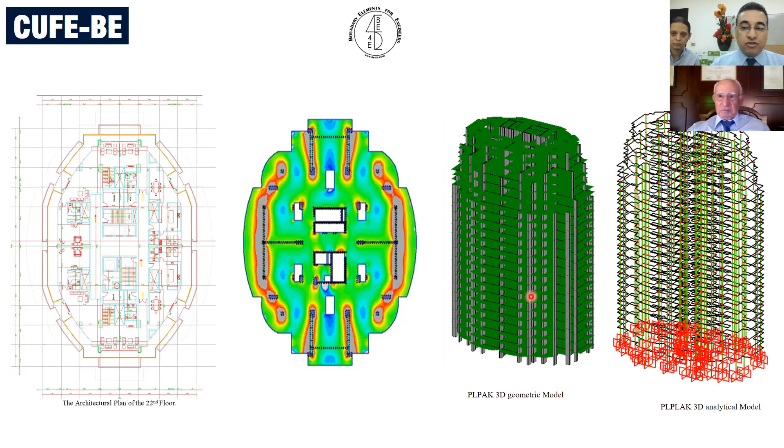This is our software in front of you. It can easily replace any available finite element-based software, and I'm going to show you the advantages of using such software. I'm not asking anybody to remove the software they are using or replace it with mine. Not at all. I'm asking you to try using two different software, one based on finite element, one based on the boundary element, at least to get a feeling that you are doing the right modeling.

We will start with a table of contents. We have 5 parts. The first part talks about the basic version. The second part is about the design tool, because we design according to the Egyptian code of practice, the ACI code of practice, and the Euro code of practice. Part 3 will talk mainly about the foundation package.

Part 4 is about the post-tension package, where we solve post-tension slabs with an optimizer. You can get cable profiles and then optimize your profile, because post-tension slabs have very good applications in the States and in the Gulf area.

Part 5 will talk about the dynamic package and how to couple superstructure with substructure, including nonlinear soil structure applications. We will also move to link it with Navisworks and demonstrate 4D and 5D for construction engineering. So you have everything, and I'm going to demonstrate videos showing this.

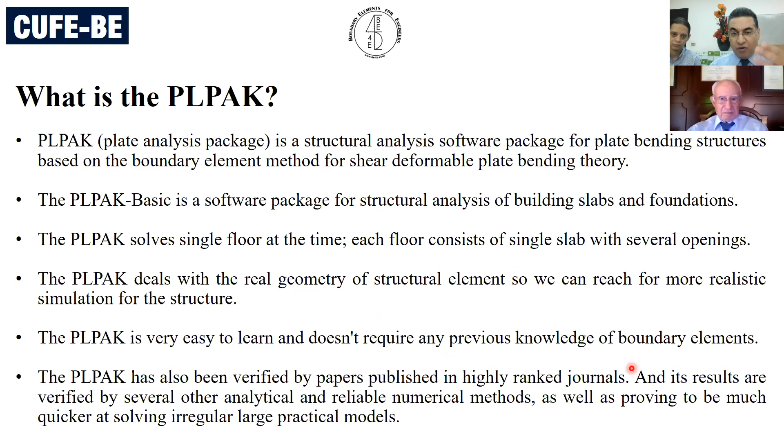I'm going to show that the best thing about PLPAK is you don't have something called an analytical model. What you have is a real drawing. You change it to something we call a building information modeling model, then you can develop your model type. As I say, I left all of that for any person to come back to.

We mainly have packages: the basic package, which solves one floor; the post-tension package, which solves one floor with post-tensioning; the design tool package; and the foundation package, which solves a foundation on piles, even with nonlinear piles and pile-pile interaction, pile-soil interaction.

We also have a dynamic package. If we couple these packages together, we get a tall building over a fixed base. If we couple the foundation package with the fixed base, we get the overall package.

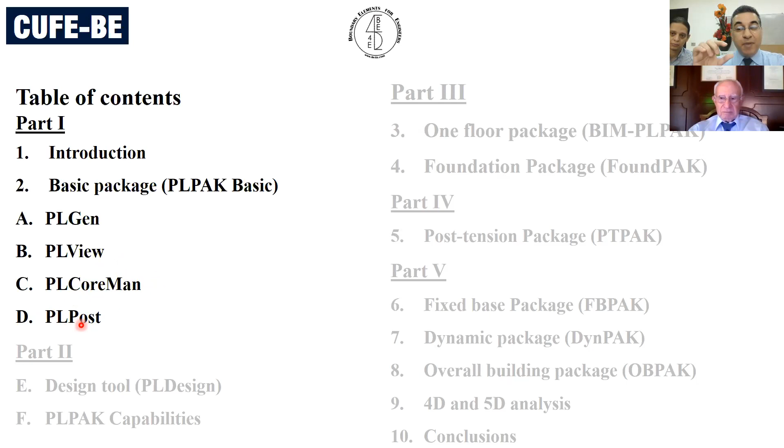The basic package, I'm going to talk about solving one floor only. We have PL Gen to generate your building information model, PL View to view your numerical model, the solver, and the post-processing to demonstrate the result. One of the good things is the post-processing data — you can zoom in with a lot of accuracy because you have continuous internal modeling.

This is a very simple slab with a beam, and this is the PL Gen model. This is the numerical model — you don't have points and lines, these are the boundary elements. I'm demonstrating here the beam and how it can get inside the column. You can simulate partial fixed and total fixed conditions, and this is a very simple bending moment demonstration over the beam, with these being the boundary elements. You don't need to discretize inside for people with us.

Here I'm demonstrating a very simple problem most of us know in civil engineering. This is called a slab beam type application, where the slab is carried over beams. This other one is called paneled beam type, where the beams work as a stiffener for the slab, but the behavior of the slab and the beam is just a slab.

Showing the dish shape, only one, and here you can see the dish shape inside each cell. This is very good for demonstration and teaching purposes.

Here I'm showing something we published in the ACI journal, I believe, and this is the only paper in the ACI journal that talks about boundary elements. I was even writing to them that they have to consider something in computational mechanics, because they only talk about experimental work.

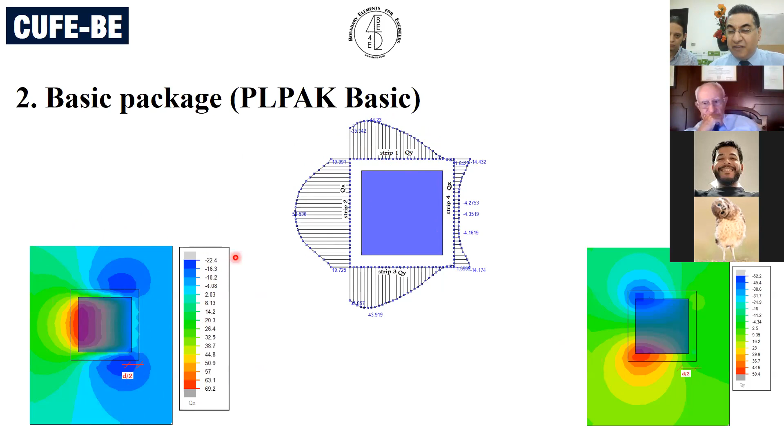You can see here the shear stresses around the columns, demonstrated as lines. This is the linear stress hypothesis for the shear stresses. You can zoom in and see the shear stresses inside and around the column. This is very difficult to do in finite element, even impossible without 3D finite elements.

We have, as I said, the generator, the viewer, the core manager, the solution, the post-processing, and the design tool. Looking quickly at the generator, it allows you to build your model, edit your model, and shows the boundary element division.

You can define materials, any material you like. As I said, I'm going to leave all the details in the presentation so you can come back to it as a standalone document. You can define load cases.

Here you can define load cases. You don't need to define combinations at the moment, because combinations will be defined in the post-processing. It's not like finite element software.

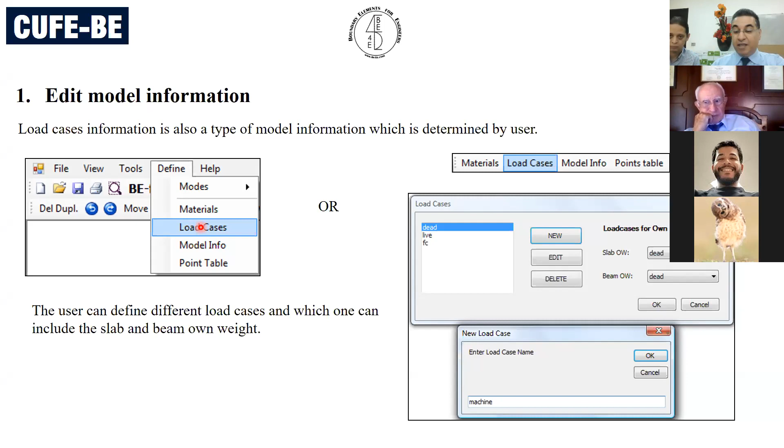You can define the model information, and this is a very important point: the beam and the column can be taken as an area. We are not cheating, we are not showing the column as an area when it's actually a point. No, it is an area.

The beam itself uses the actual size of the beam, even the first cell of the beam, and you can control it in order to model the transfer beam in the shear walls.

This is something called PL controls, which allows you to modify the program day by day. I'm not going to talk about it because it's research-wise; we have about 500 controls, some not even used. We use these controls day by day to improve our software.

You can start your building information model in one of three ways: either draw your model directly on the interface using the drawing tools I'm going to show you, or import your model from an AutoCAD DXF model.

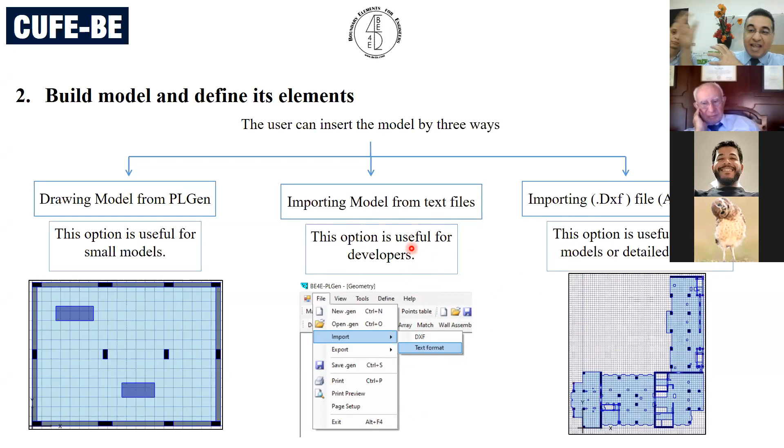You can also import from a text file. You can write your model as a text file, and this is very important because you can have other software, something like finite element-based software, use this text file as a translator and import it from there.

Or you can get it directly from DXF format. I'm going to show you how to import your model from DXF, and these are the tools, and this is to show the beam model.

Here is a drawing environment. If you want to draw, you have a grid, you have coordinates, you have everything. These are the modes you have, and these are the elements you draw at the beginning.

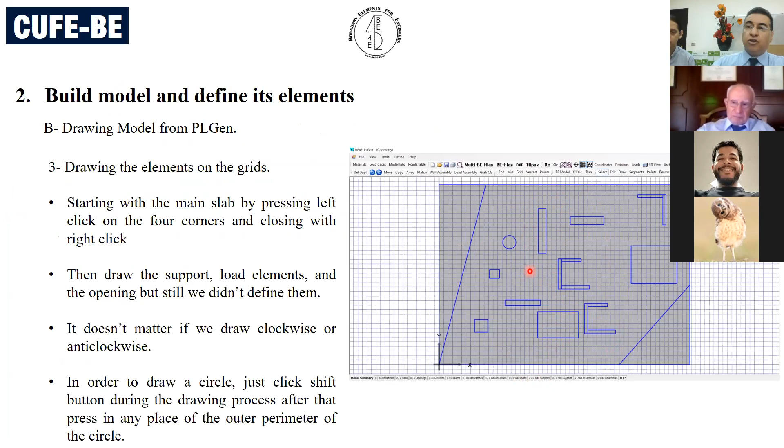You have a slab, supporting elements, loading elements, and initially none of them are defined. Once you draw your elements, at the end of the day you will define each one, either as a slab, an opening, a geometrical object, a loading element, or a supporting element. Here you select your tool and define it.

As you can see, after the definition, these are the slabs, these are the column supporting areas. We have something called wall assembly to join walls together.

I'm going to show you something we've done based on the formulation of Professor Katsikadelis on warping. We join slabs together using vertical elements, just line elements, not shell elements, but we reach the same results as joining them as shell elements using what we call a warping wall.

You can define drops, and this is done using a very intelligent trick, which we published in Engineering Analysis with Boundary Elements. I'm not going to talk about it today because I promised not to talk about mathematics today. Or you can define that the column is moving above or below the slab.

Everything can be defined in this model. Once you have this, what you have to do next is define your load cases.

This is element by element definition about its properties. This is the columns, for example. This is the wall support. You have columns, you have wall support, you have soil support.

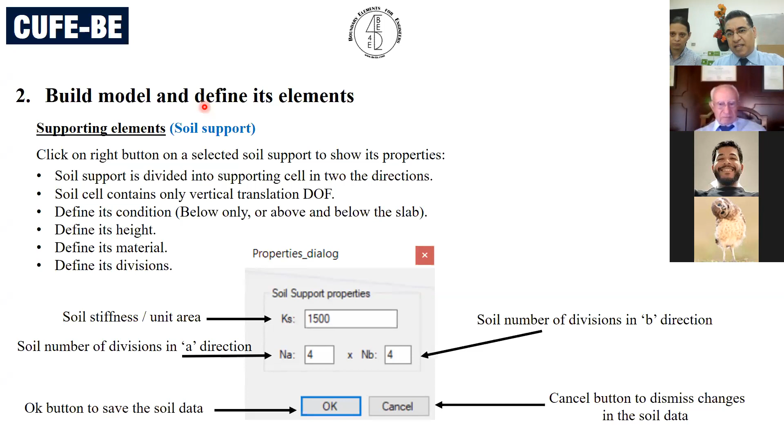And if you have layering, you can have all types of layering, even the way of Steinbrenner approximation. It is based on colleague work for Professor Katsikadelis, Professor Stavridis. This is the soil support drops. You can define it. I leave all of the details here so anybody can come back to it.

Wall assembly, if you have assembly of walls, as you can see, this is wall assembly. Even if you have very strange column shape in the plan, you can define this column shape with the actual area, and you can get exactly the straining action, and in the vicinity of the column, you can check of punching.

And you will see we were able to check of punching due to warping. And we published this also in engineering analysis.

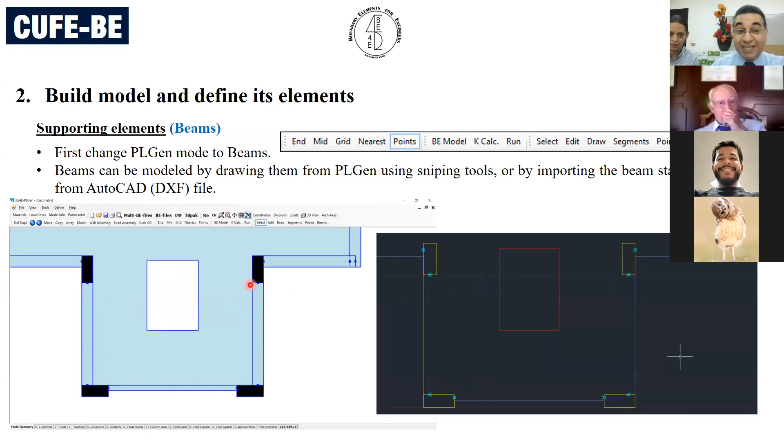Here, the definition of the slab, this is the analytical model. Here is the analytical model. It is not a drawing. This is the analytical model. We don't have wireframe anymore.

Okay, this is the definition for the beams. Here, I'm going to show you how the beams go inside the column for the partial fixation or fixation. Even if you have a beam just touching another beam, you can compute the torsion transfer or the moment transfer in this area, in this way.

This is the definition of the column load, the loading elements. We have geometrical elements, slabs and opening, and you have loading elements and you have supporting elements. Wall load, load patch, wall and load assembly. If you have wall and load assembly, something like this is silo over piled raft, and we were able to model it.

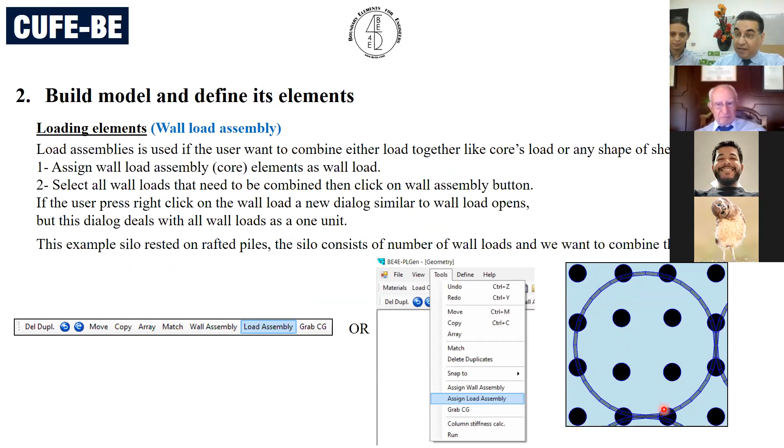We have used this software in a lot of practical applications here in the area of Egypt and North Africa and Gulf area. This is, for example, the silo problem.

And here is the tools you have in the PLGen generator. You can match properties. For example, if you have the property for this file, you can match all other properties. You can draw array. It's the same like the drawing tools in any CAD tools or anything.

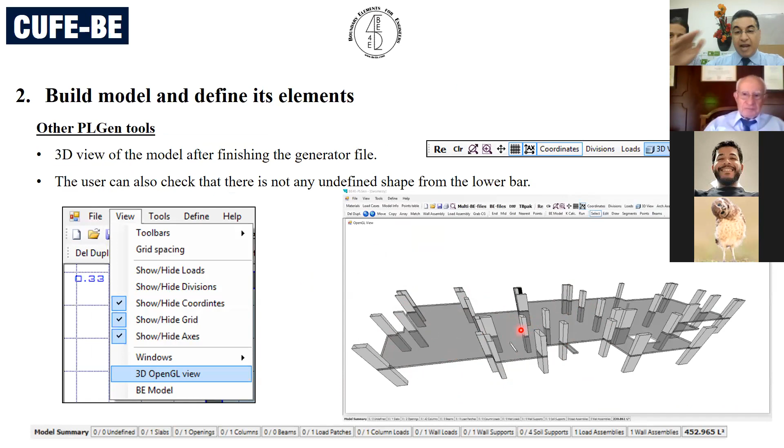This is the view, a 3D view in OpenGL mode for your slab to check that you have done everything correct. You don't overlap anything with anything. At the end of the day, you can define your division.

In the building information model, we start to move to the numerical model. With the numerical model, you define all of your divisions here, but it is written as a property of the object.

Here, it shows the divisions also. We finished now. How can we generate our model?

If we go to the BE model, it is a numerical model now. With a numerical model, I'm going to show something very, very important. Just keep concentrating with me because I'm going to show something very important.

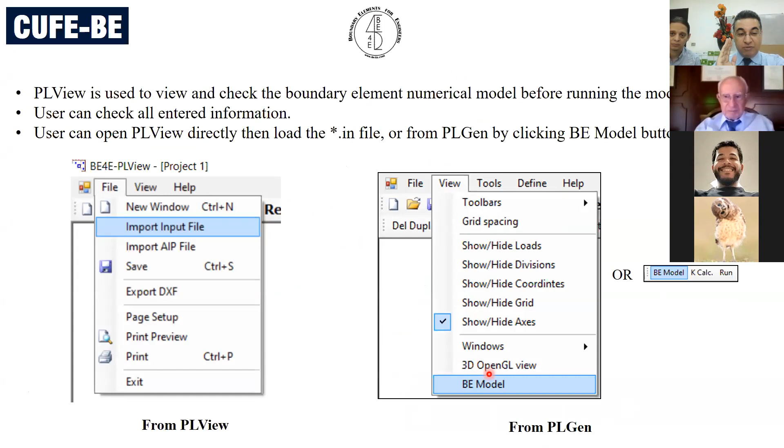This is a numerical modeling with different load cases. If you have different loads, it will show differently in the 3 views. And all this is a toolbar you have.

You can define the normal, you can define the direction of the boundary. It gives you the numbers of the boundary element and everything you have. You can zoom in, out, anything. And here is a numerical model you have.

The most important thing I'm going to show now is this. This part, when I'm going to show you the support takes some sort of colors, as you can see. These colors tell you what are the groups of stiffness you have.

And this software is very, very important. You can define multiple stiffness supporting elements. For example, if you have a plate supported on a truss, you can do it. If you have a plate supported on a very strange structure down to it, what you have to do is define the stiffness, and it will be shown here.

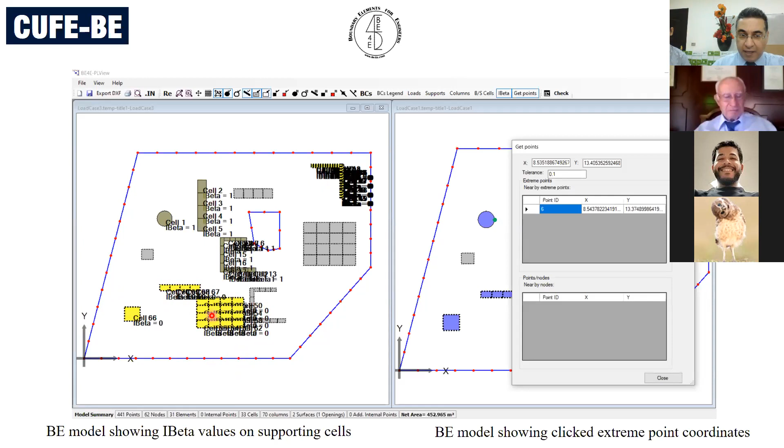For example, here we have this area is a supporting area, supporting structure, and this is another supporting structure. Even if you have a circular column with circular area, we don't cheat. The circular column with circular area, in the numerical model, is defined as circular area.

And this is very important for piles. You can show your result in tabulated form also.

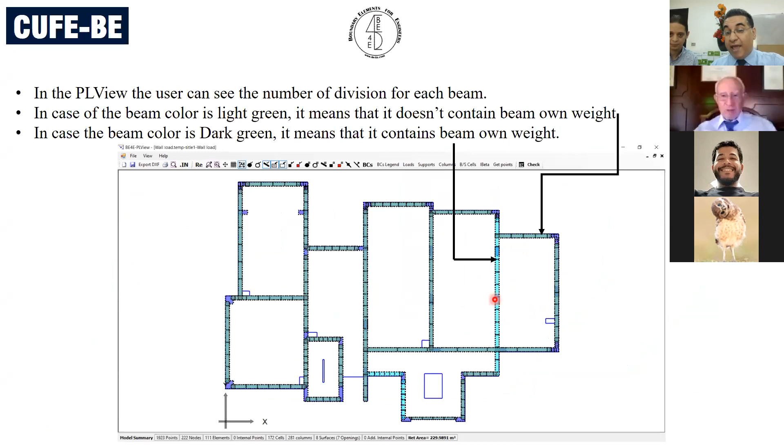Here, you can define all of the objects you have, like how many surfaces and how many objects you have. I'm showing that one of the beams here is not loaded with its own weight. This beam has its own weight, and this beam is without own weight.

It will show you also. This is the numerical model. If we go for the solution, it's done.

I'm sorry, we just have an internet connection issue. I'm back here now.

Fady, can you come with me, please? What are we doing here? How can I share the screen? Okay, Fady is an expert in doing this.

So we are back now. I'm sorry for this, but we experienced a lot of internet connection issues, but we will come back. It's not a problem.

In the solution manager we have... and share, okay, is that right? The solution manager here, you can start to run one by one. You can sit down.

We can run by load cases, and we have several solvers. We have the normal solver, the GPU solver, and multiple core solution. For example, here in Cairo University, we have a very big server, and we run this using several cores.

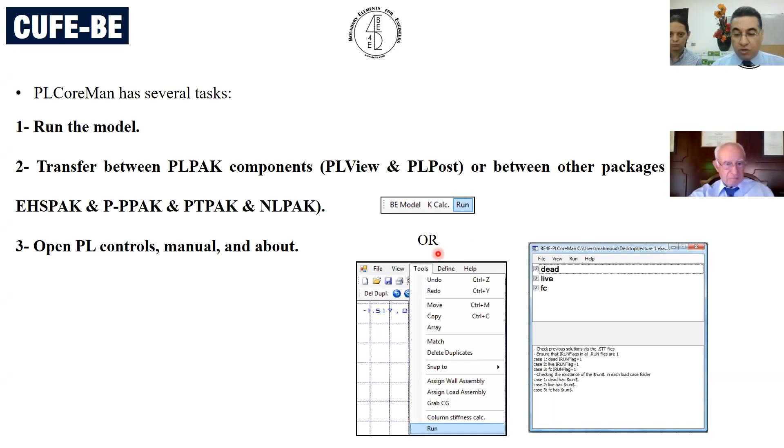This is the solution. It shows you the case by case solution. The most important thing here is you can add your stiffness for the elastic half space. For example, if your raft is supported on elastic half space or supported on piles, you can link it to the elastic half space model and link it to the pile solution.

Okay, or you can go directly to the design package. After the solution, you can go direct to the design package. So this is before the solution, and this is after the solution.

After the solution, I'm going to demonstrate how we can show the results. First, before anything, you have to export some data from the model you have.

For example, if you have a wall assembly, this assembly has to be imported from the object itself in the model before we get the results for it. Because of that, we imported it from the generator, and this is for the wall assembly and for the beams. Then here we can define all assemblies, and we can also define load combinations.

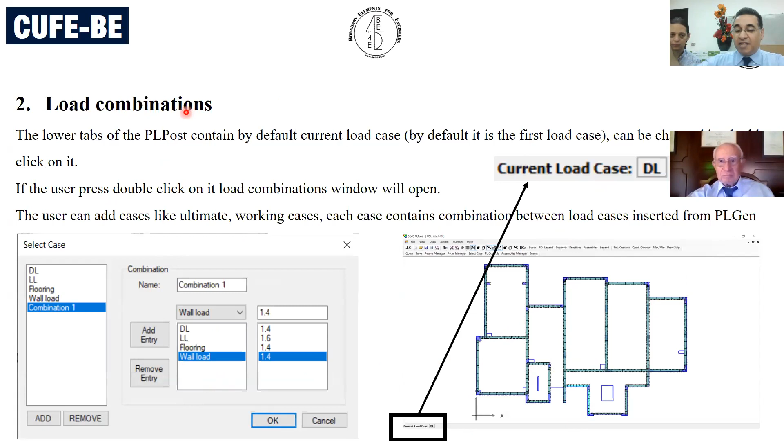Now the load combinations are defined in the post-processing stage. We don't define the load combination at the beginning. You can show the result as contour lines, rectangular contours, quadratic contours, or you can show strips, linear strips.

Here I'm going to show the contours. This is the contour lines for the moment, for the deflection.

You can show the rectangle contours over area, and you can zoom in with different resolutions. You can use 10 by 10 points, or 100 by 100, or even 1000 by 1000.

You can even have it very, very smooth, and draw it as a flat contour like this. This is very important to zoom in on places where you have an opening, columns, or something like this.

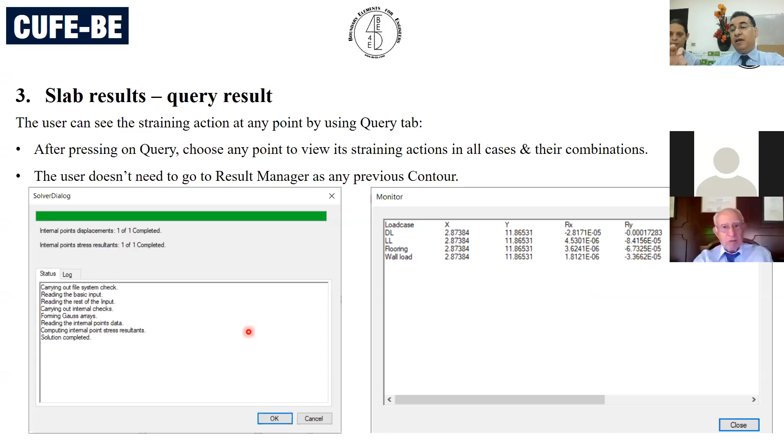Or you can pick a point and get the result at this point. These are the strips. You have a strip, and you can get any result you want—moment, shear, even the moment in this direction. Even the design moment, where you add the MXY according to the Wood-Armer equation.

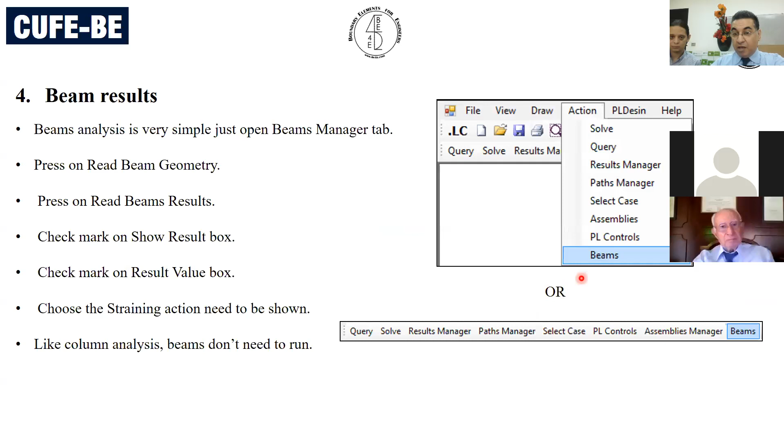You can show the support results here as a pressure or as a total load. You can show the assembly result. For example, if you have a multiple core load assembly or something like that, you can demonstrate the assembly results, or you can demonstrate results on beams.

You can have it. The design tool, I'm going to leave it for Ahmed Fady to represent. Okay. The design tool is a tool used for the PLPAK, plate bending.

Again, we have an internet connection issue. I'm sorry.

Actually, we are using here two ways of the internet, so we are swapping. Once we have a problem here, we swap to the other one.

So continue. The design package is to design the slab and the beam using 3 codes: ACI, Eurocode, and Egyptian code of practice, and there is applicability to add any other codes required. It gives not only the design values but also calculation sheets in Excel or spreadsheet format, and CAD drawings.

Also, you can check punching and check deflection over irregular spans. Yes, over irregular spans, this is very important. This will show how to get the PL design from PL post if you are using PL post or for the core manager.

Then we will talk about the design package in 7 items: what the file needs to be exported from the model to use in the design, how to start the PL design, define the load combinations and the envelopes. You can design based on the envelopes, not only load combinations.

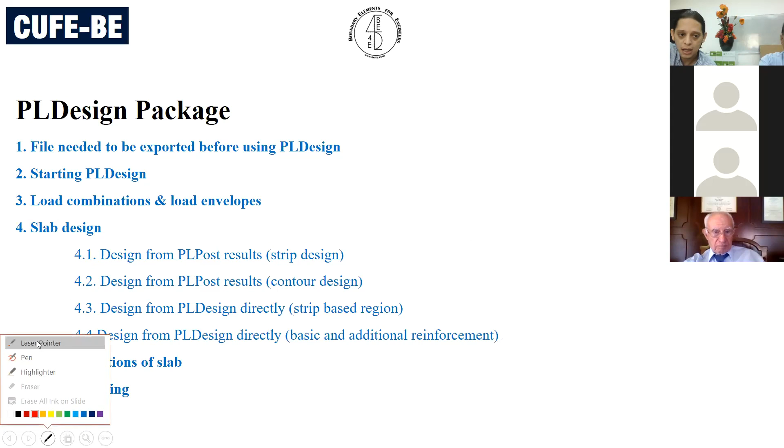Then we will talk about the design of slabs in 4 cases, and the check deflection, check punching, and beam design.

First, we export 3 main files. Export beam assemblies to read the assemblies of each beam from the gen model to a PL design model. We export the results file - we can save results from PL post and use it in the design - and export the assemblies file, as Professor Youssef said, for the assembly cores or assembly supports.

How to start the PL design? You can start with the model you already designed before, or a new model. In this window, you will choose your code.

There are 3 codes, as we said, and the parameters of the steel and the concrete. Also, you will choose the units you will use in the design, and define the material properties you will use in the design.

After that, you will define your load combination and load envelopes you will use. Slab design can be done in 2 ways.

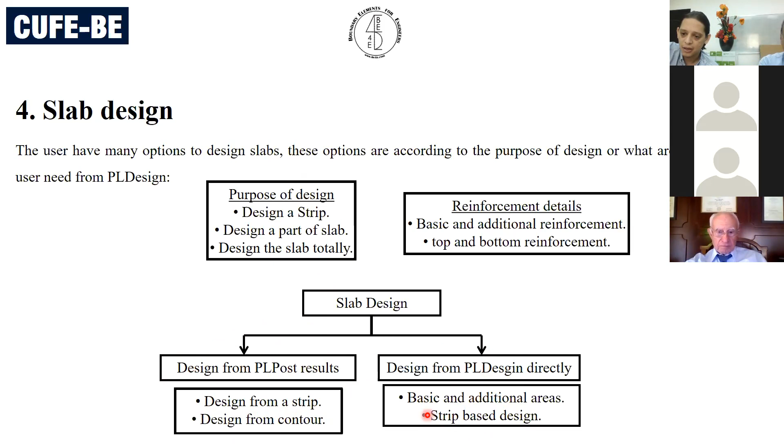I have already saved results from PL post and I design based on 2 methods, strip method or contour method, or I haven't saved the data from PL post, so I will use PL design directly, using 2 methods: basic and additional, which is common in civil engineering design - in Egypt, I don't know how it is in Europe - or strip-based design.

So we will talk about these 4 methods. This is the strip, already saved from PLPost. You can import it here in the PL design from the results file you have already saved.

After that, you will choose design slab, and from design slab add strip to the main model. After that, you choose add strip to this model. You define the 2 parts: the first part, the above part, is for strip properties - the widths of the strip and which moment you will design based on it.

And units - you integrate the moment over the strip; we don't use only one value. We integrate the moment to smooth it, and we put our reinforcement over the strip.

Exactly, and the second part, in the bottom, is to define the spans. The PL design automatically divides your strip into spans. In each span, you will define the cover of the reinforcement concrete and the detailing - the details of the steel, number of bars, the diameters of bars, and the arrangement of top and bottom.

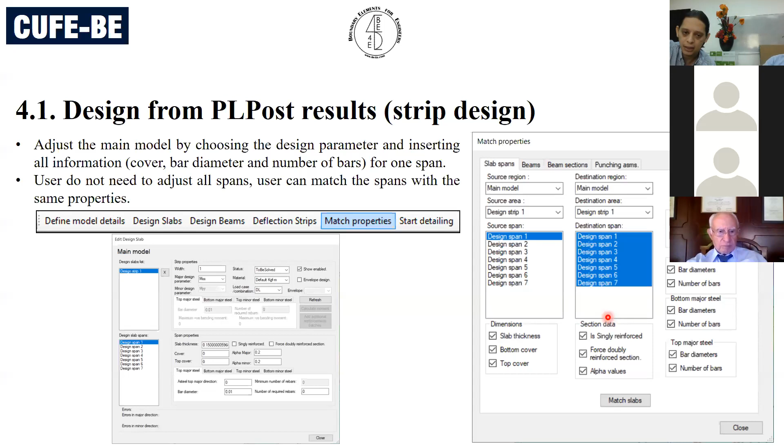And then you can use match properties to match similar spans and other strips. Then it asks you if you want calculation sheets in Excel format or not.

This is the Excel format here, right? Yes, this is the output Excel sheet format. It gives you the code equation number and the value in front of it.

After that, you will check the design to ensure there are no errors and it's safe. If it's unsafe, you will increase the steel and repeat the same steps. After that, you can export a summary of this design data in only one Excel sheet.

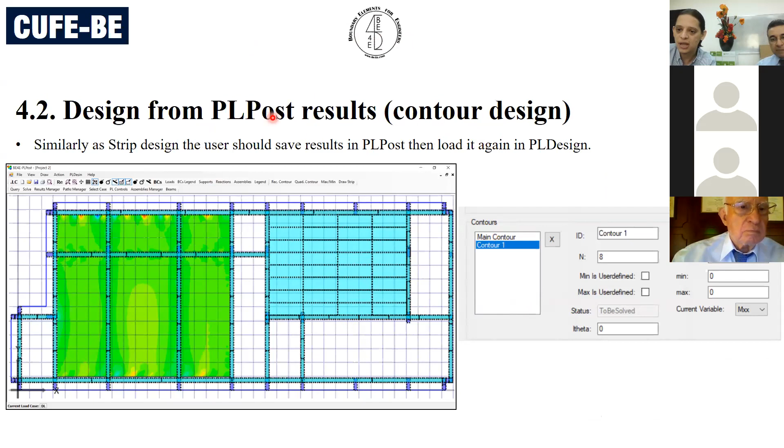The second part is a design using contour design, already saved from PLPost. The same way, we draw a contour on the PLPost and then import this contour to the PLDesign. After that, same steps: add strip to main model, but in this step you will choose your saved contour data, which divides this area into 2 strips - a strip in the X direction and another strip in the Y direction.

You will define the properties of each strip in the above part, and each strip is automatically divided into multiple spans. You will define each span as before. Same as before, you will start the slab design.

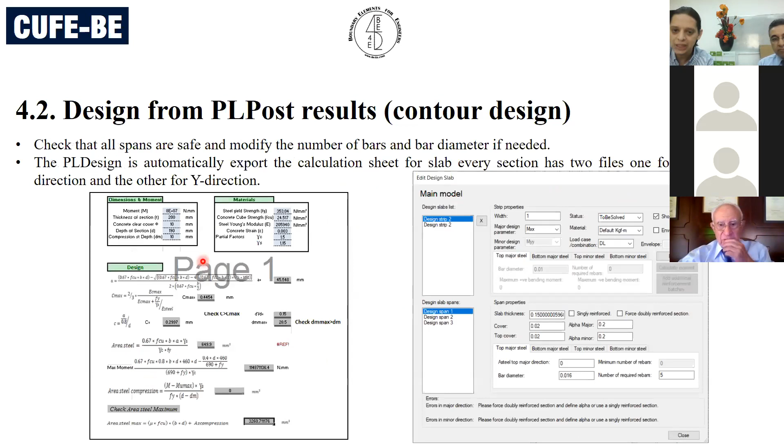He asked if you want to export Excel sheet data for each span, for each strip, and you can export the design data and summarize it in only one Excel sheet.

The third slab design method is directly by strip. This is what I like, but people don't use it because you need to design several strips, and also additional areas in one shot. But this is actually the correct method.

PLDesign directly using strip based is the same as before, but here we choose create new region, since there are no previous results. After creating your new region, click draw and draw the area you want to design. There are two options: basic and additional, and strip based design. Here we choose strip based design, and this region will automatically appear here.

After you start the design, you will divide this.

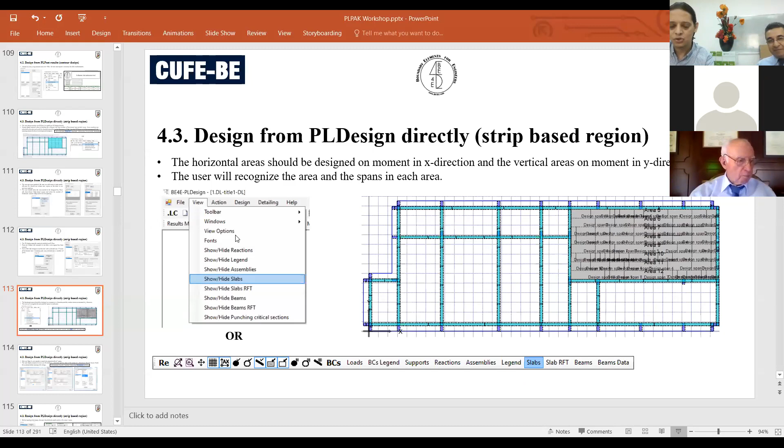Again, I'm sorry. Today we have a series of interruptions.

He divided the strip, the area you chose, you draw strips in X and strips in Y, and each strip is divided into spans. You define it the same way using match properties, define the spans and define.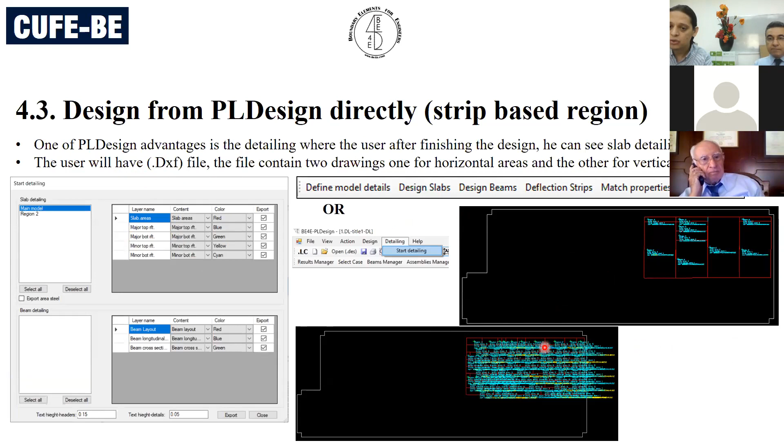After that, you can export the DXF file containing these areas to CAD, including its reinforcement details.

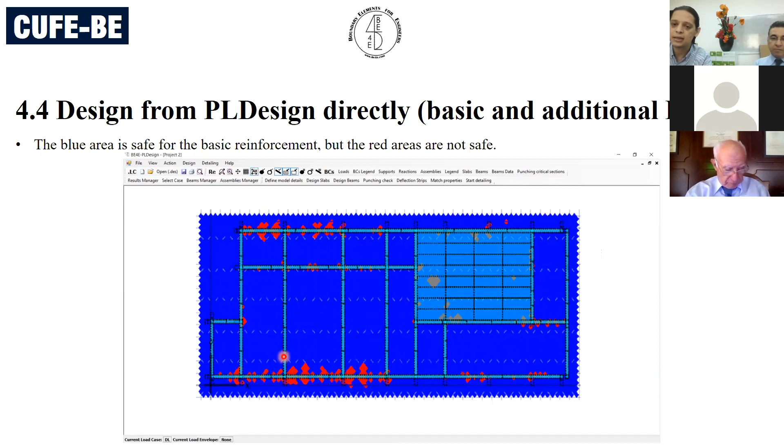The fourth method, basic and additional, is common in Egypt. You create a new region, draw this region, and define in the first part the main mesh - the main basic steel you add in the two directions, top and bottom. In the bottom part it's the additional you require. You will define that, and after you solve, the blue parts are the safe bending moment areas due to the basic plus additional you added, and the red parts exceeded the moment of resistance of your mesh, so you need additional there. You will draw additional areas, solve, and start the build design, exporting data summarized, or the DXF file as we used.

Now we will talk about checking deflection. We can check deflection on strips, any drawn strips in the PL post. Here you choose the major design parameter to check based on, either a bending moment or maximum deflection, with effective length, and this is based on the ACI code. It, like any other code, gives you the check of deflection based on simple spans.

So if you have, for example, a very irregular flat slab, where is the span? What we have to do is draw the moment and compute the point of inflection, because we have a smooth internal model. We actually use finite difference here. Once we compute the point of inflection here and here, this is the simple beam span you need to check against the ACI code or any other.

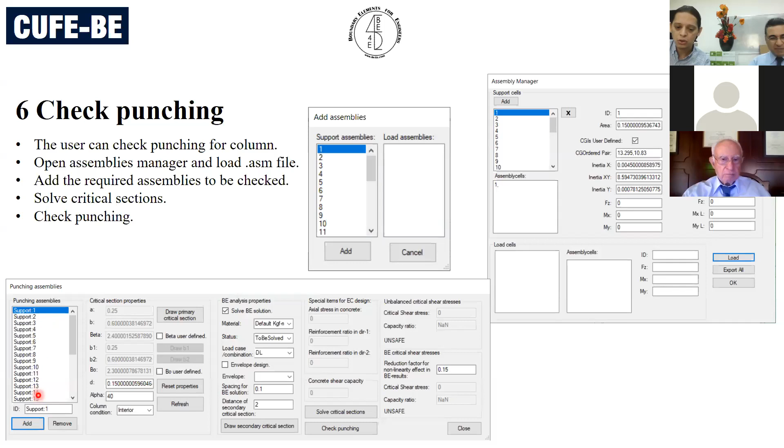We even published this, and wrote a paper about the theoretical basis of the ACI punching equation. After all these years, boundary elements were able to prove the theoretical basis of the punching formula, and we extended this to include warping effect in punching.

Here you can see a punching effect for an irregular column. You can't do this in any other software you have.

This is a practical building. This is a punching calculation, or two-way shear calculation. Even if you have beams, sometimes you fail in the two-way shear in the slabs, and this is very important. I actually sent all of this to the ACI punching committee, shear committee.

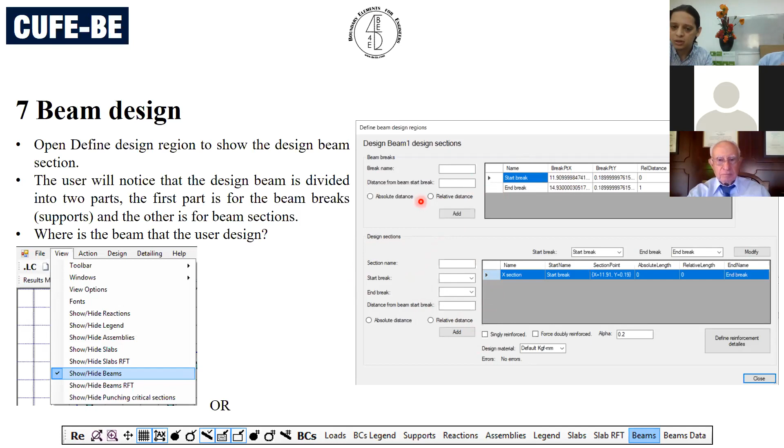Now we will talk about how to design the beams in PLPAK. Divide the beam into two parts: the first, in the above part, is called breaks, and this section is called section design. The breaks are at the support locations, and the sections are in between. If the beam is divided into breaks and sections, the breaks are at the supporting elements, and the sections are what you define to be designed.

Positive moment or negative moment. After that, for each section you can add the properties, the cover, the reinforcement, and all this data. Actually, I don't like this stuff, but we are civil engineers, we have to do it. Actually, I like the mathematics part.

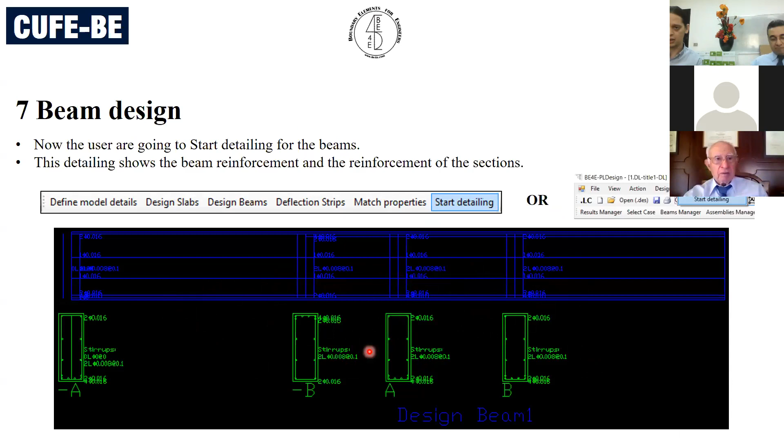After that, you can use match properties for other sections. If you have a lot of sections, you can export the design data for the beams and detailed Excel sheets using calculation and DXF. These drawings are generated directly from the software, exported directly from PLDesign without any modifications. You can get these details without any calculations or drawings on the CAD.

Okay, finally we finished the PLDesign. We will go to the final part, the last item in part 2, about PLPAK modeling capabilities.

The main capability of PLPAK is that there is no longer domain meshing. You have the domain as it is. You can define the area supports and all elements, the actual geometry of the supporting element and loading element, and there is easy input. You can input using multiple DXF or multiple text files.

For example, if we have a piled raft, you can assign one guy to draw the piles, and another guy to draw the slab, another guy to draw the loading elements. Once you have all of this, you can merge it together using DXF, or merge it together using a text document.

Yes, and it's very easy to learn, I think. What you need for this basic package is 2 hours max, because you already draw the DXF as the real geometry, you didn't do any modification.

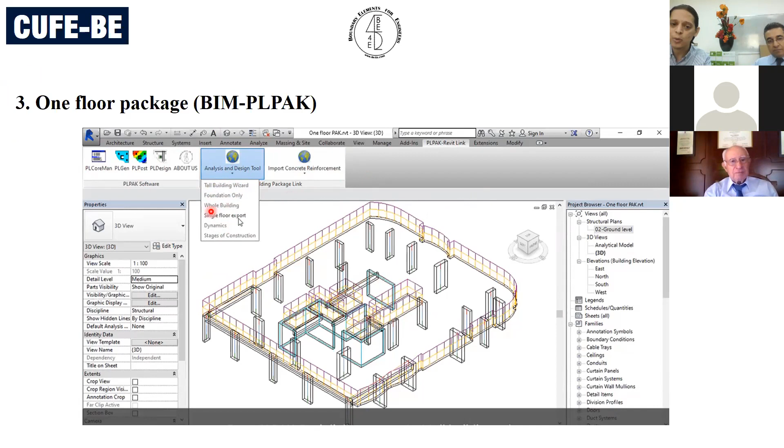From what you draw in Revit, you can export to PLGen automatically, you won't need to draw any data in PLGen. Just run the model and get your results in PLpost, and design it in PLdesign, as we said before. Then, after you finish the PLdesign, you can click one button and restore your reinforcement detailing back to Revit automatically.

So we go there for analysis and design, and come back to Revit for detailing and getting the drawings.

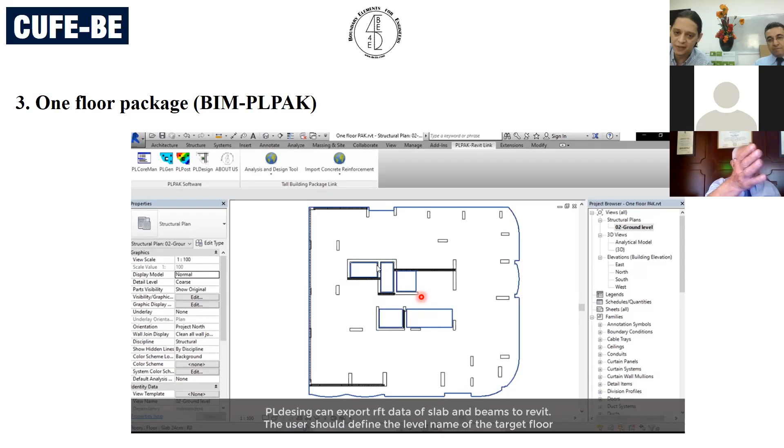Yes, you go from exporting the model from Revit, using the PLPAK and the design, and restore the reinforcement automatically to Revit again for the beams, and you can see the same for the slabs. Yes, the reinforcement of the slabs and additional areas you put in the PL design. All of this is done automatically.

Okay, we will go now for the foundation package. Also, the foundation package, you can draw it from the PL Gen tool, as said before, or from Revit. We will start with PL Gen. You can draw this piled raft with loading elements. All of this is the loading elements, and this is a 3D model. These are the piles, a simpler pile, with internal discretization. You can place the pile anywhere you like. This is the 3D model of the piled raft, and this is the loading elements.

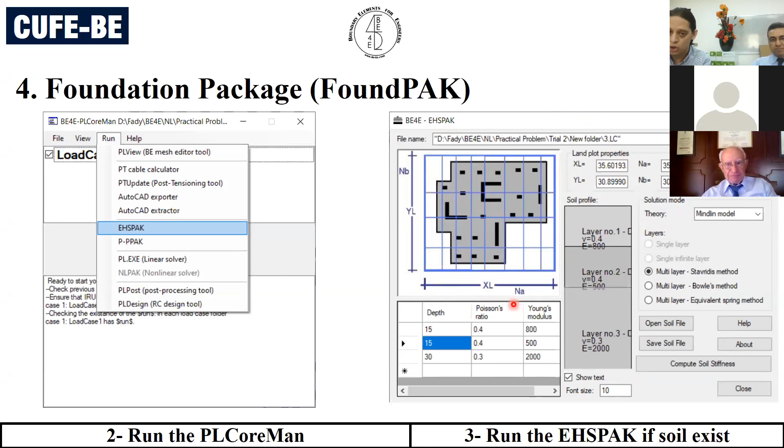After that, if we have a pile, we go to the P-PPAK, which is a tool to calculate the pile interaction and the pile-soil interaction effects. From this, you just browse your input file. By the way, people in the literature regard using the Mindlin solution for half space, or the Mindlin solution for pile interaction, as using the boundary element method, but this is not a boundary element, this is analytical solutions.

After that, in the pile editor, you can get the ID of each pile and define the nonlinear properties, load set, and pile load test of each pile. I can here define the test from the field. You can get the data and put it in. Through this window, you can define for each pile its pile load test data, and after that run nonlinear analysis, and you will get the nonlinear settlement or up to failure.

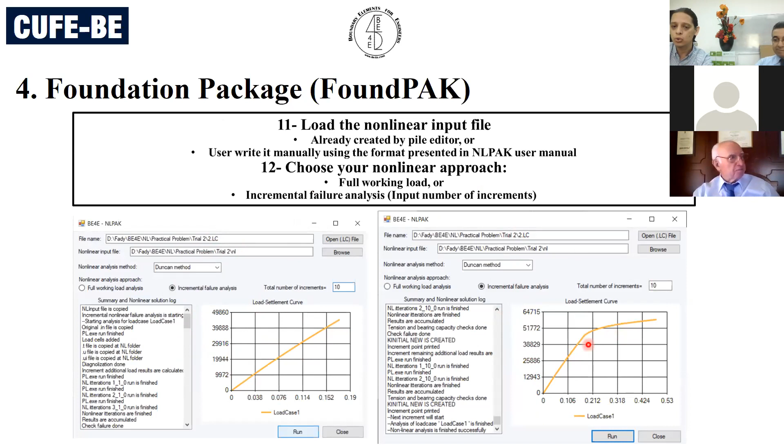You can load for the building. Or also, we will say at the end of the day, this is a load settlement curve of the pile raft up to failure or up to a certain load. Here in the PL post, you can show which piles failed and which piles didn't arrive at their capacity. After that, you get the contours, nonlinear settlement, and nonlinear bending moment based on this nonlinear analysis.

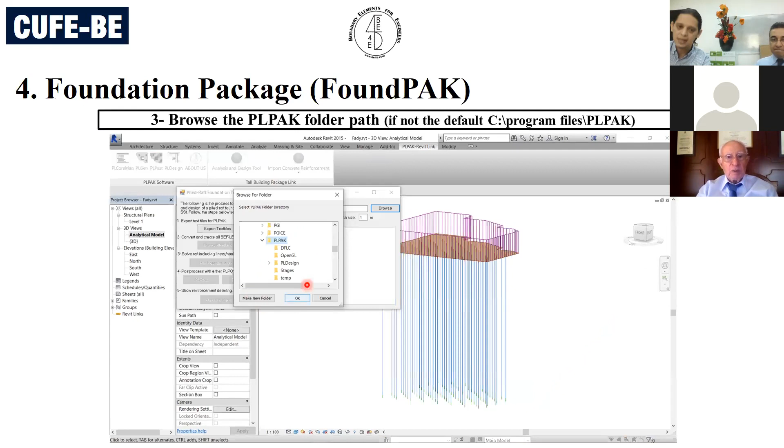Here you can draw your model, we can move down to the building information modeling. Instead of our software interface, we can use Revit for the same, for the foundation model. Draw your raft, put your loads, the layers of the soil, the piles - all data is exported automatically. This is the analytical model in Revit. You can export a text file, then it follows the sequence, you can read it. After that, export the text file and export BE files, run PLCoreMan, save, go to the elastic half space - all of this with the wizard inside Revit.

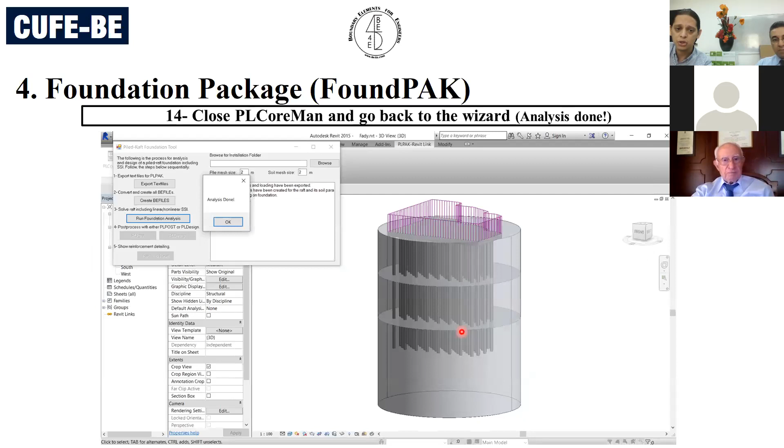You will not go to PL Gen or PL Post. All of this is what we call BIM center software. Loading the soil input data automatically exported from the Revit feedback, and importing the input file of the pile interaction already exported from Revit automatically, nonlinear data, and running the nonlinear analysis - you can show the final reaction of the soil, or the deflection on the raft, or the bending moment.

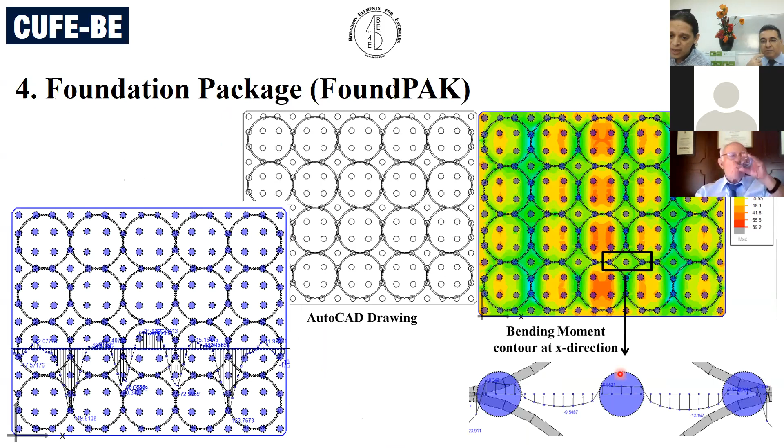You can check punching even if you have soil. This is another building, silos on the pile raft, and here we can show the bending moment inside the pile area, in the domain of the pile. This is another pile raft, pile caps connected with the beams, and we can solve this huge pile raft with beams.

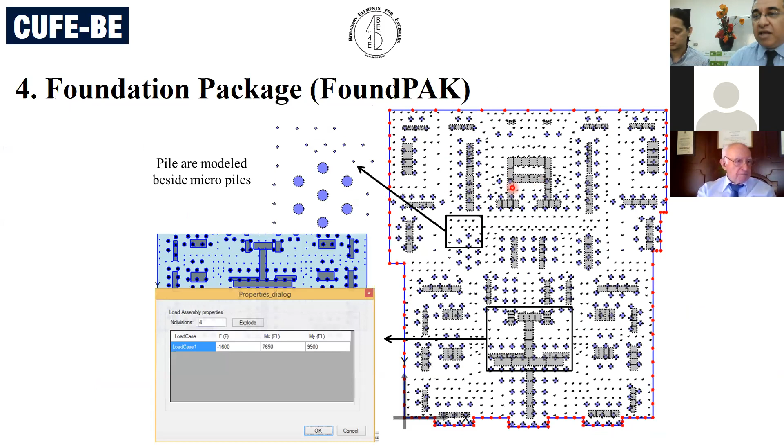And with very few boundary elements, as you can see, very few boundary elements. In boundary elements, some people say if I reach the correct answer with something like 200 by 400 finite elements, we will use also 200 by 400 boundaries. No, not at all. What we need only is something like 10 by 20 or something like that. Boundary elements are very, very efficient in this.

In the foundation package, we also do an iterative technique between the superstructure and substructure, either coupling them using iteratives, or we can do it directly. We published this in the ASCE journals for the iterative techniques, if you are interested in solving the superstructure using ETABS software or something like that. But we can go direct for the overall building with our software.

Now we will go to part 4 about post-tension packages. Post-tension is great in boundaries. It's great, more than great, to be honest, in boundaries. It's called PTPAK, post-tension package.

It's shear deformable plate tools. Also, we use ACI and Eurocode and Egyptian Code of Practice, and you can add any code instructions. The best thing is it allows you to place the cables as you like.

According to the bending moment you have, what you have to do is just draw a strip. Near this strip, start to get the point of inflection and place your post-tension cables directly. You have a 13 template for the profile of the cable. You can do any load combination and envelopes.

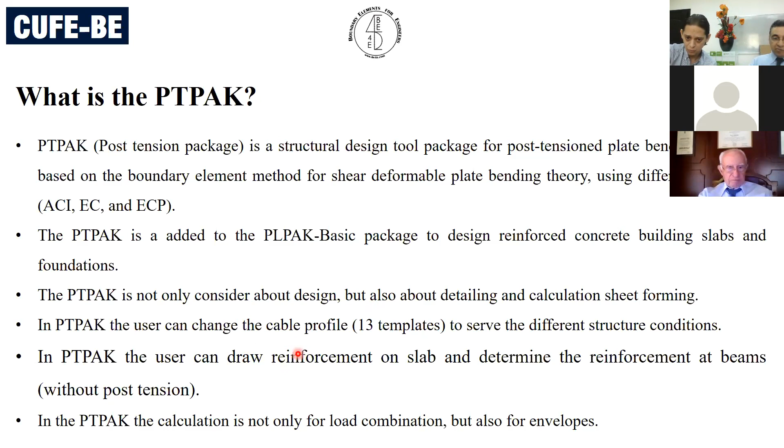We start using PL design. We will talk about what files you need to export, how to draw the cables data, the cables template, multiple cable selection, and how to solve using the PT-Pack and the check of stresses.

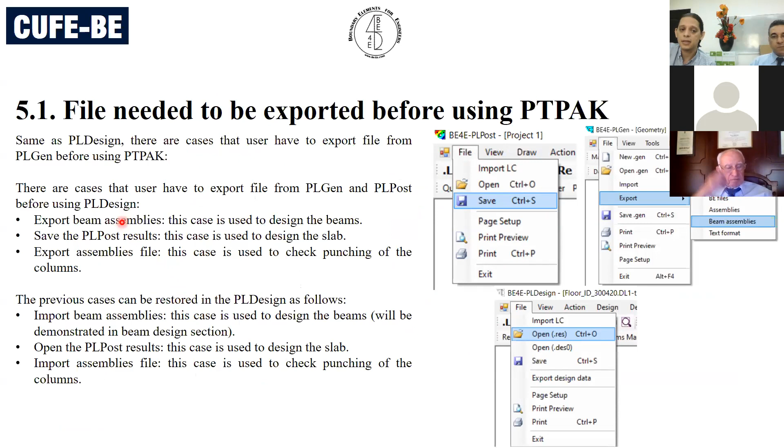You can draw the export from PLGen, export your model to text format, and then put the data in a folder, and then save the beam assembly data, or save the results from PL Post if you want.

After you open the PT-Pack, it will ask you if you design reinforcement concrete slab or post-tension slab. If you choose reinforcement concrete slab, you will go to the regular PL design. If you choose post-tension slab, you will go to this module. New interface we have.

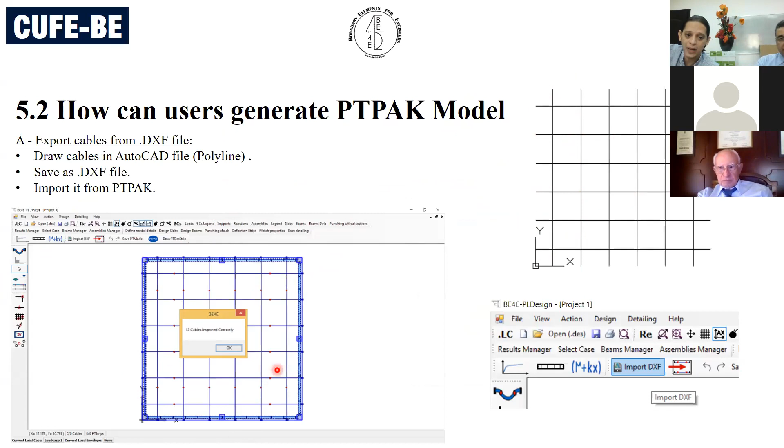This interface added some buttons here for the post-tension, drawing tools to draw this. This is a model. You can draw cables through a DXF file. You can draw your cable profile in the DXF and import it automatically from DXF, or draw your cables here using this drawing tools, draw cable and array and snap points and all of this stuff. Reminding you that all of this stuff uses boundary elements.

After that, you define the material properties and the divisions of the cable, the losses definitions, okay, and select each cable and you define its data, start and end cables.

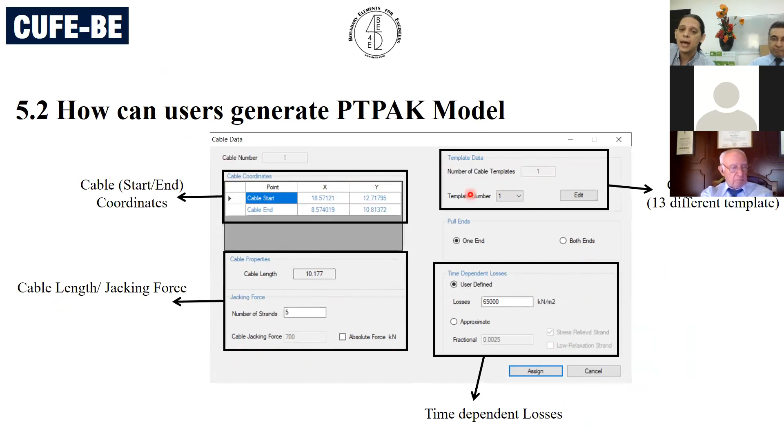You can edit it and the jacking force, define jacking force, define losses, and define the template you will be using in each cable. This you have certain templates with different shapes. Design moment or the displacement shape, you can choose your template from certain templates.

Also, you can not just edit cable by cable. You can choose multiple cables and define their properties in one shot.

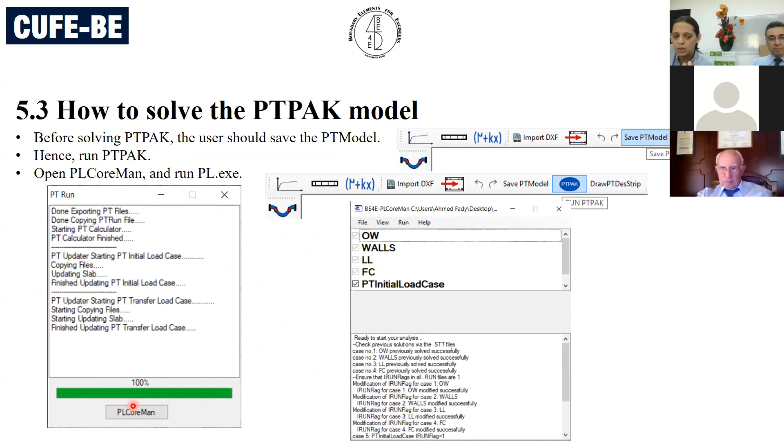How to solve PT-Pack? After you draw your profile cable, you can run the PT-Pack button. It will calculate the post-tensioning cases. After that, it will go to the PL core manager and you will run as before. In the PL post, you can define load combinations as we said before, or envelopes.

After that, you solve the post tension slab. You can draw post tension strips here, or anywhere in the slab. Then you can check this strip.

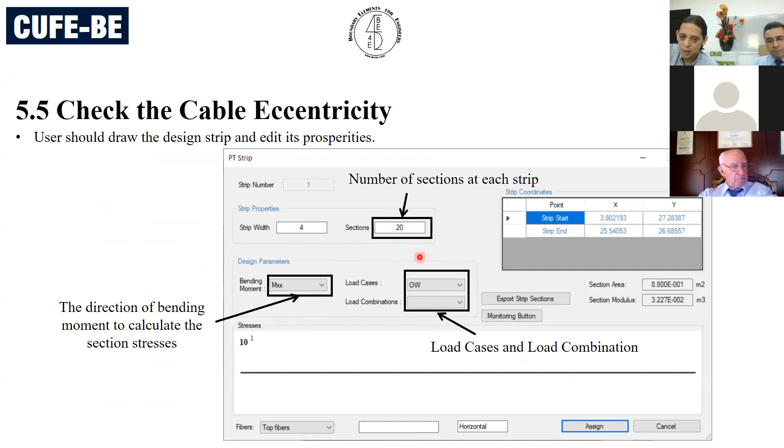You decide which moment, not only in the X or Y direction, but in any direction. You define the number of sections and load combination, run the strip to get the top and bottom stresses, and then check your stresses.

Now, for post tension we also have an optimizer. You start your solution and it works directly, giving you the optimal solution. Or if you have a ready-made design from another software, we can import it here and do value engineering for it.

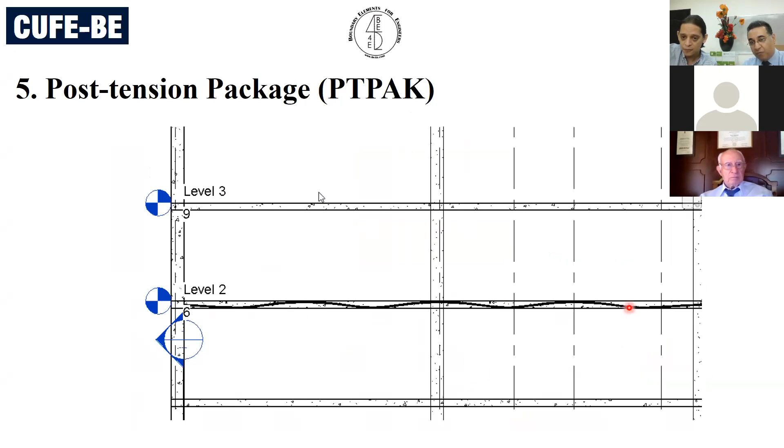This is already the post tension package, like a basic package. You can import it from Revit and the cable profiles go directly to Revit for the details. You can see the profile cable inside the slab in Revit, and this is the plan profile in Revit for the cables.

This is a demonstration, a video or something. I think we have to start. This is a video, I think yes.

We can show this video here, showing how to import the reinforcement data from post tension after I finish the PT pack solution and export a text file containing the reinforcement. I just choose this file and it's automatically imported here, in Revit. This is the Revit model I already exported to the BL PT pack.

Yes, this is the cable already imported. This is the overall building you have. You can choose your floor to import these cables into it.

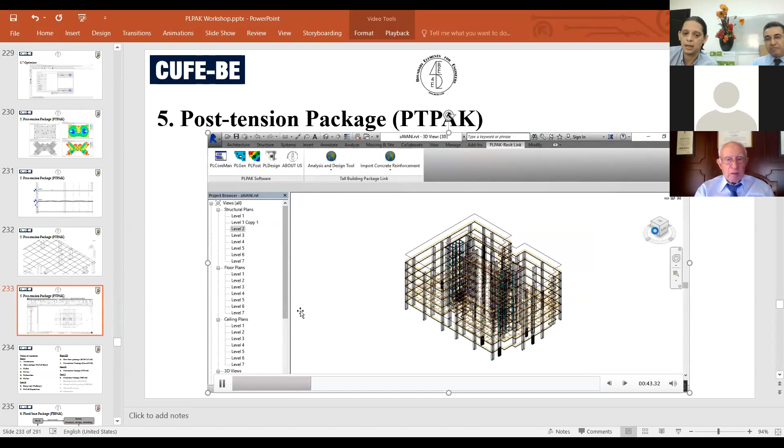I knew it is a huge presentation because it is 8 packages, not only one. It is 8 packages, and this is work of more than 20 years, to be honest, with a lot of colleagues here. But all of them believe in boundary elements.

This is the vertical elements reinforcement. This is the cables after being imported in Revit again.

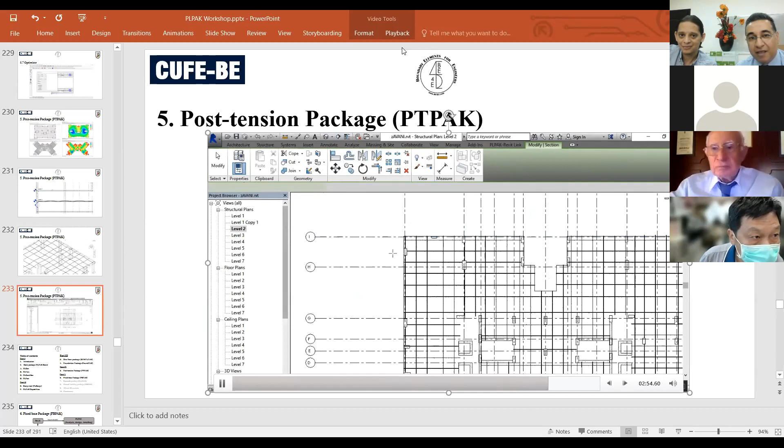I can see Professor GT Chan with us, just welcoming him. And I guess Professor Xing Hua is with us also, I'm not sure, I don't have the total list of participants. The one that appears to me is Professor GT Chan, I'm just saying hello to him.

When we go to the last part of this presentation, we will talk about another package, the fixed base package, or tall building package. In the tall building package, it's BIM-centered software, as we said, this is very important. Our idea is to make everything BIM-centered: we start from Revit, go for analysis and design, and come back to Revit for details.

You can see how boundary elements can help in civil engineering, because Professor Stavros Syngellakis, I don't know whether he's with us or not, was asking me that this is something very strange to be done in civil engineering applications. But boundary elements can do anything, even in cosmology.

Yes, this software is BIM-centered with a lean process, and only one engineer can do all of this: analysis, design, reinforcement, and quantity. If you go for a bid or something like that, you need to know the quantity, and in one day you can solve a huge building using several combinations.

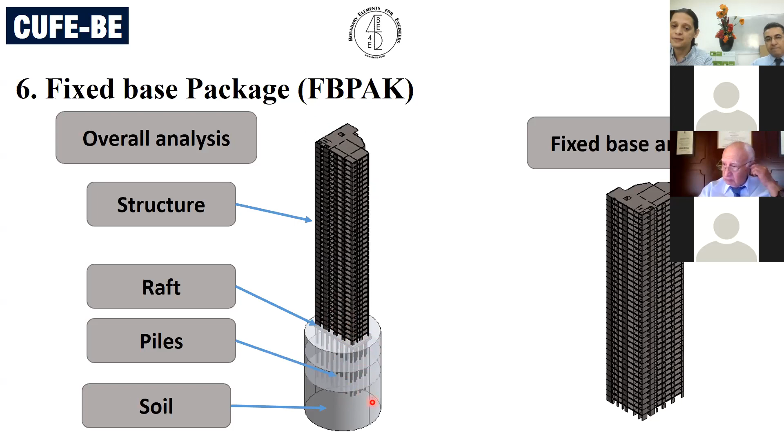If we export the building only, it's called fixed base or tall building package. Or overall, if we draw the raft, pile raft, and soil data, we will talk first about fixed base. This is the wizard inside Revit.

You will export text files, and then data will be exported automatically. Then we go to wall control to calculate warping functions, and post processing in PL Post and PL View. After that, this is very important: if you look at Revit, it shows you the overall building, but our software works slab by slab.

So we need to show the straining action over the vertical elements. We developed a tool to demonstrate this in 3D in OpenGL mode, these are the tools. This is a deformed shape of the building, and the straining action comes from our software.

Yes, this comes with the straining action, with the bending moment, and this is in the PLPAK form. This is the vertical element design and reinforcement.

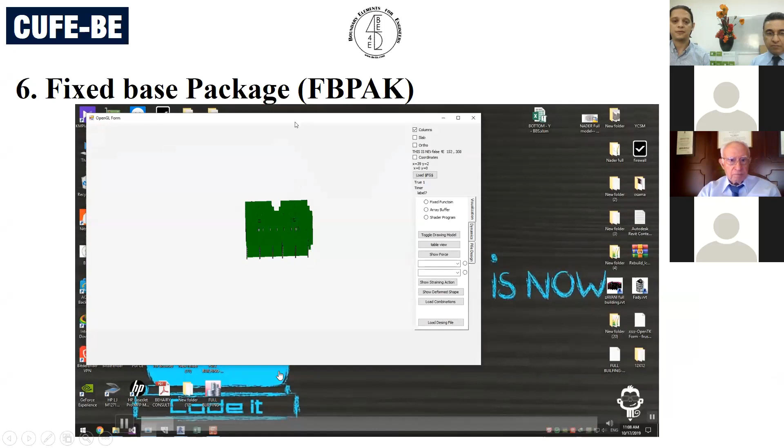This is also a video showing how this is the 3D model. The 3D model pack lets you import, define load cases and load combinations, and show the straining actions you want on the vertical elements. This is a wireframe model, but it's not just a wireframe, it demonstrates the straining actions, and you start the design of the vertical elements from this tool.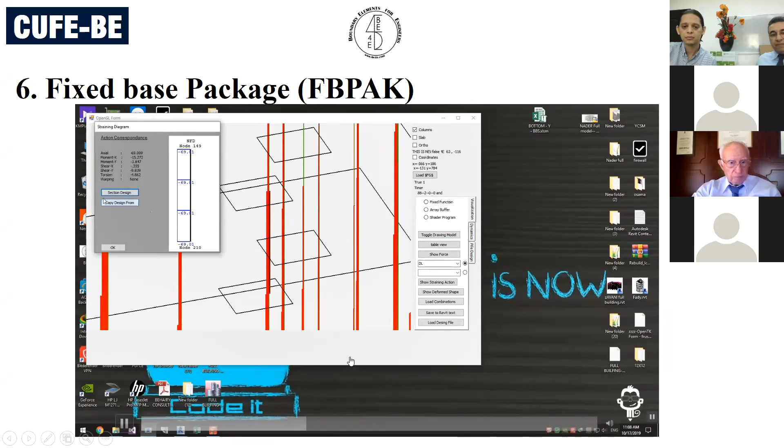Design of the cores. You can zoom in and zoom out and all of this. This is the reinforcement of the core.

After finishing the design in the OpenGL or 3D PLPAK tool, he imported the reinforcement back into the Revit model, opened Revit, and imported the design data. You can see the steel here directly.

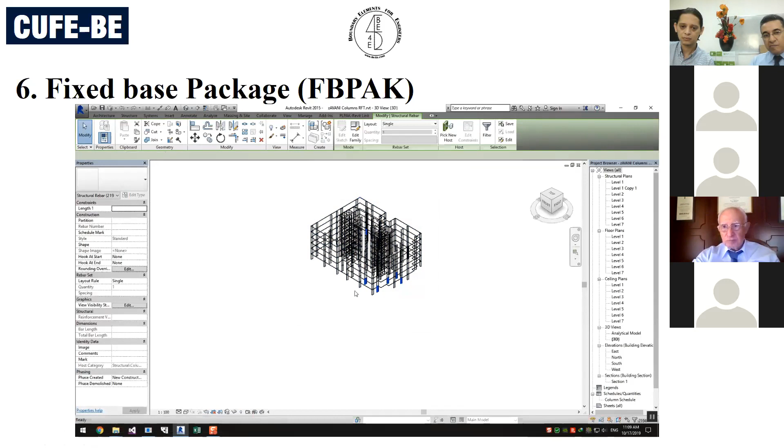Imported the text file of the design data of the columns and the cores. The log file appears. Now these are the reinforcement directly, and you can see it with the stirrups.

This is a real time video. You can see here everything for the core, the import, and then you come back.

Here you can also use the PLDesign for the slab. Slab reinforcement with additional details, and you can show the connection between the slab and the walls with reinforcement, and all the design drawings and details directly.

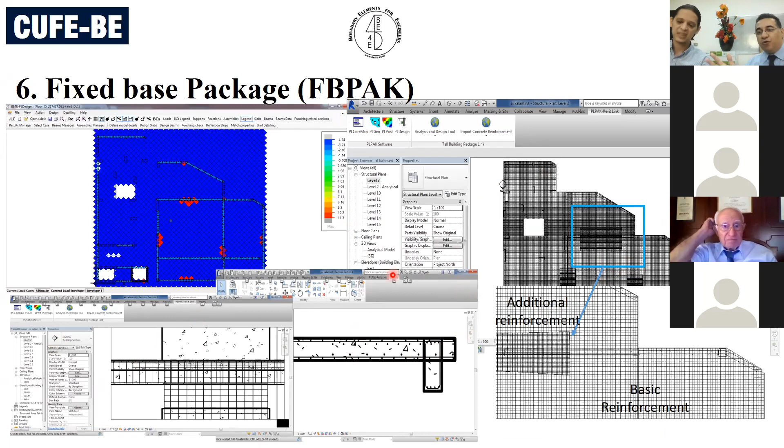You don't do it directly, Revit does it for you. It designs the beams, and this is the beam reinforcement exported automatically to Revit, with the stirrups and everything. After that, from Revit, once you've finished your design and reinforcement details, you can calculate the quantity of reinforcement.

This is a huge building solved using the PLPAK.

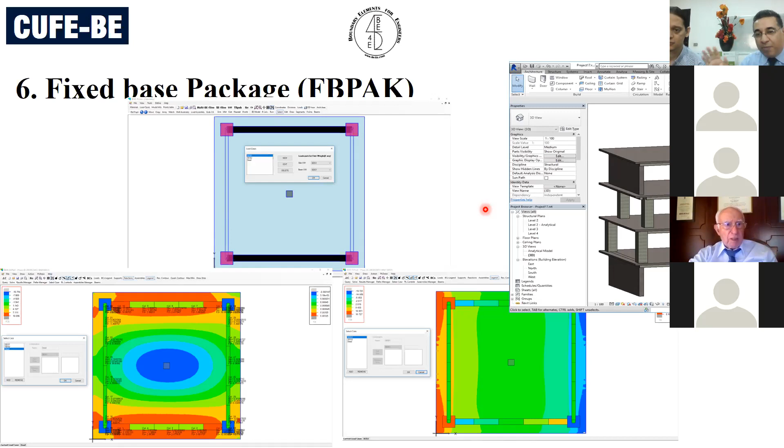Here we show the connections. You can have all types of connections. For example, if you have a wall resting on two columns, or the opposite, we made all combinations. It's embedded inside this wall.

This is a real building from 35 to 40 floors. This is a gen model here, this is a Revit model, and this is a PLGen model. This is a 3D PLPAK view and a comparison between boundary and finite elements. The same, yes.

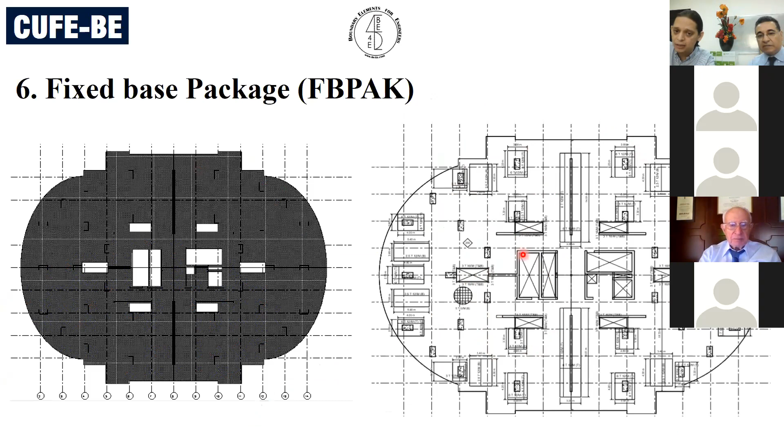This is the reinforcement of the slab, and this is the drawing. You can get detailed design drawings automatically from Revit after your reinforcement. And these are some cross sections from Revit, detailed. You didn't draw any of these sections, you already get them automatically.

This is another building we already solved using PLPAK, with a comparison against SAFE. This is a PLDesign, slab design and vertical elements reinforcement.

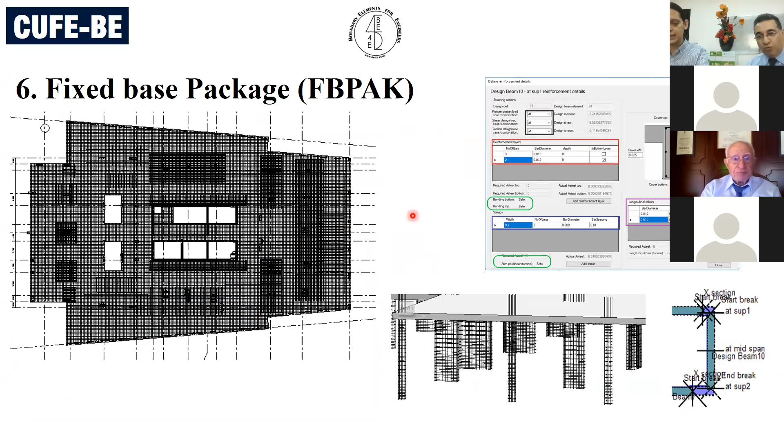All of these are just showing the types of buildings we can handle, what boundary elements can do in industry. This is design drawings, what engineers want, and we give it to them. Engineers take a long time to do these drawings.

This is another real building, the one we started with in our presentation, and I told you I'd show you step by step how we reach something like this. This is the design, with details about core detailing, wall detailing, and the column planted on a beam with its detailing. All of this you can do using PLPAK.

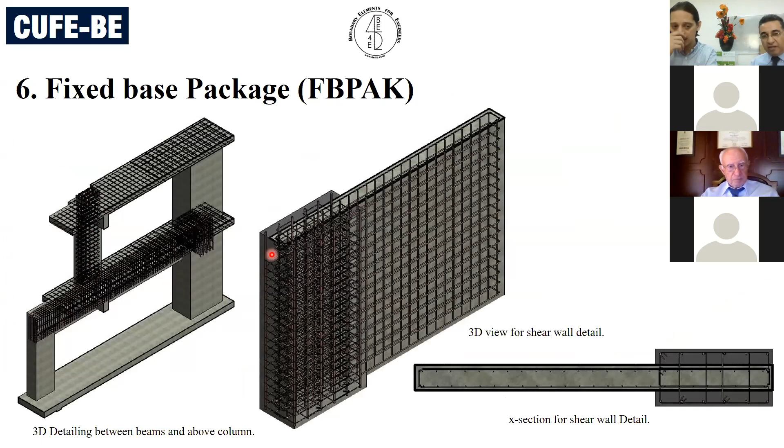We will now go for dynamic analysis. The PLPAK can solve dynamic analysis, including free vibration and time history analysis with damping effects, and you can use it in performance-based design.

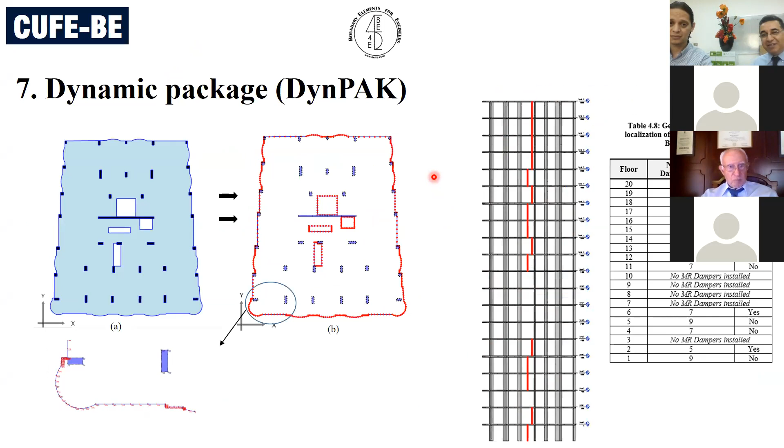Overall package, you can analyze the whole building, including the soil, the raft, and the pile raft. You can solve it in one shot without any substructuring, including linear or non-linear soil structure interaction. The non-linearity means you can go to the field, get the pile load test, put it inside the foundation package, and link it to the overall building, and it will sort out everything for you using the stage of construction.

Even with stage of construction, yes. This is exported data of the overall building. You will get the elastic half-space and the pile interaction all solved before, and you have the load settlement curve with non-linear analysis of the piles, and this is a 3D view in PLPAK.

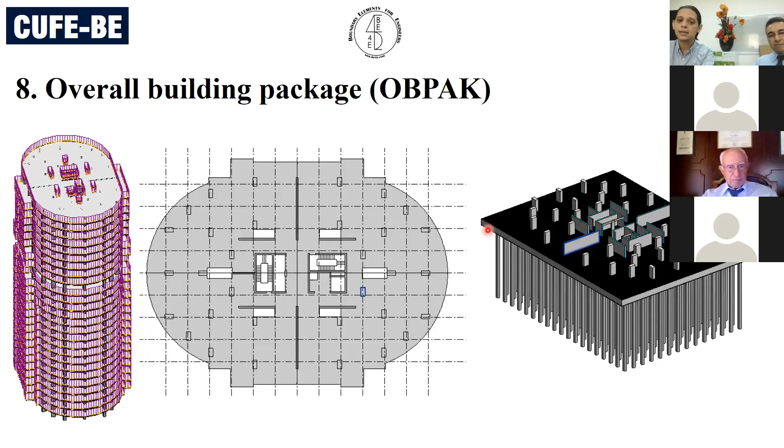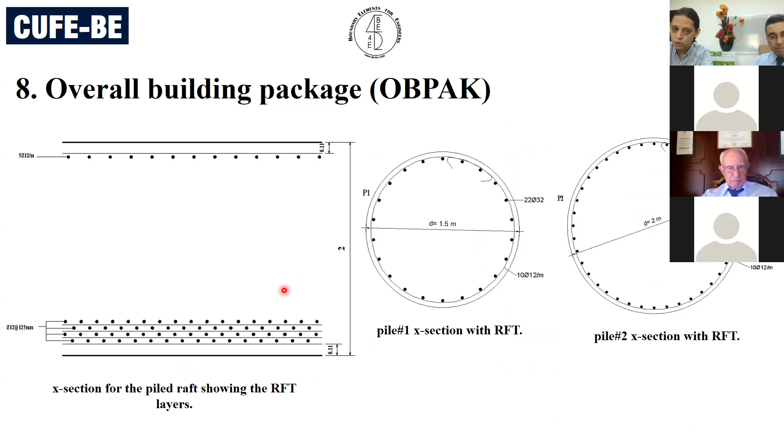This is a real building solved using the overall system, and this is a pile raft. This is the design of the raft, supporting raft detailing, and the pile reinforcement. This is another building where you can use different pile patterns and different raft shapes to optimize the number of piles and the pile data to get the optimum pile raft design.

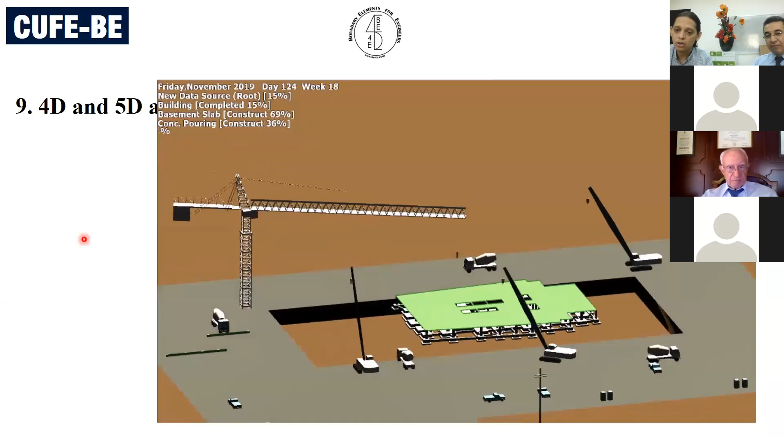In Navisworks, you get this timetable and the construction stages as 4D and 5D. You can see the construction of the building directly linked using a movie. We can generate this movie directly, based on the results and the reinforcement already calculated using PLPAK.

And you see the building being built step by step, with the reinforcement shown. You can zoom in and see the reinforcement, everything. And actually, I was planning to have one colleague from computer science join us.

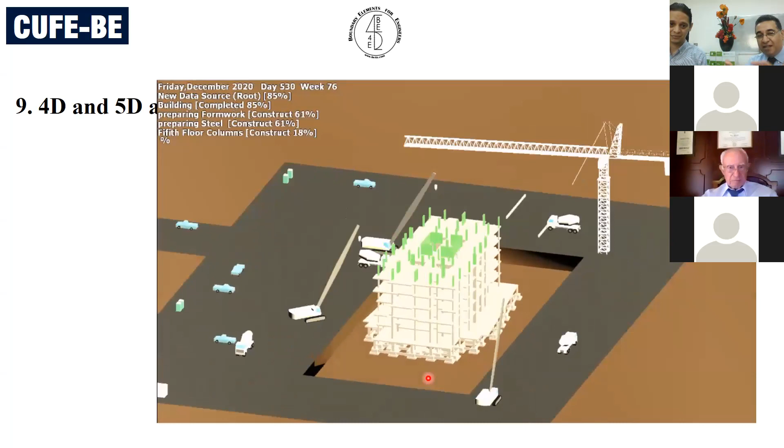We want to approve the building steel directly. What you have to do is go there and take a photo from three places, and we use image recognition and pattern matching to approve the reinforcement directly, without sending engineers there and taking a long time to do this.

At the end of the day, the presentation is finished, and I have just one conclusion. I always say you can do anything with boundary elements. I get genuinely upset when I meet someone who says we can't do this with boundaries. No, we can do everything with boundaries, and I'm demonstrating here what boundary elements can do in the civil engineering industry.